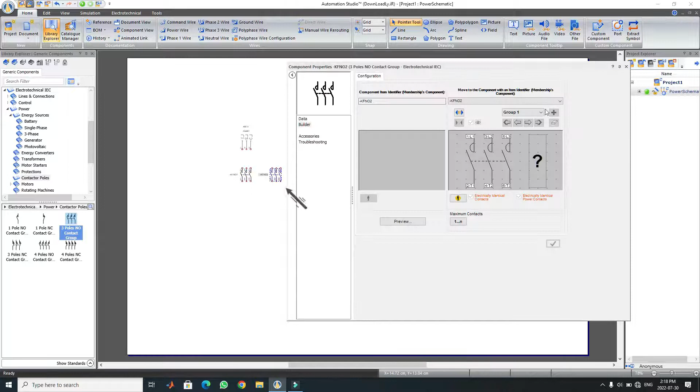This contactor will be used for rotating the motor clockwise. And this contactor will rotate the motor in the other direction, in this case anti-clockwise.

Fuse to protect the motor from overcurrents. Thermal overload to protect the motor from overloads.

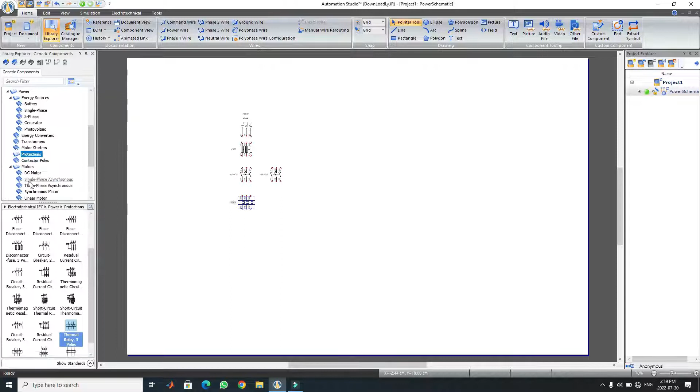This contactor will be used for running the motor in delta connection. This contactor will be used for running the motor at starting in Y connection. Let's connect the circuit.

To change the motor direction you must reverse any two of the three power wires. Notice that L1 wire is transposed with L3 wire.

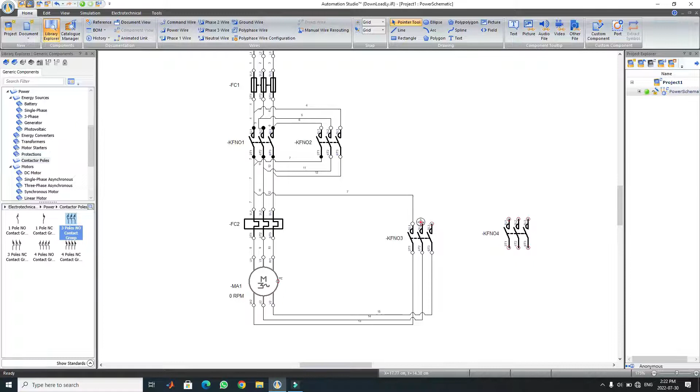You should also notice that the thermal overload is connected inside the delta configuration, so that it can be as close as possible to the motor, and to reduce the cost, as the phase current is lower than the line current by a factor of √3, hence the thermal overload rating will be lower. To connect the motor in Y configuration, the coil ends are shorted together.

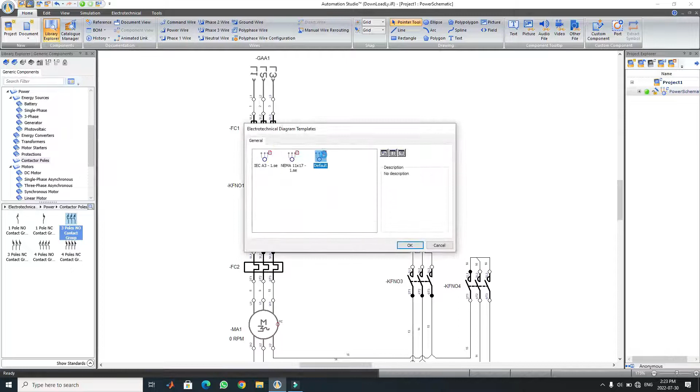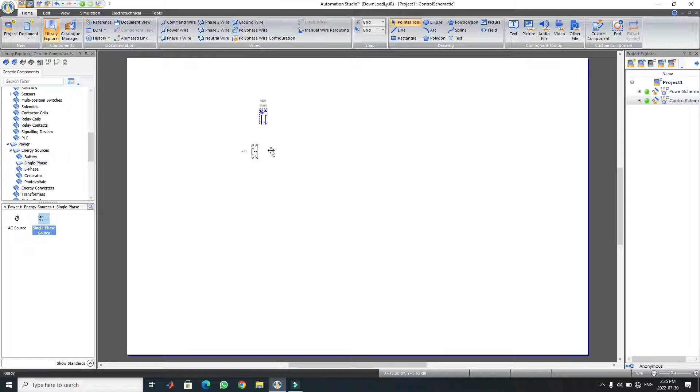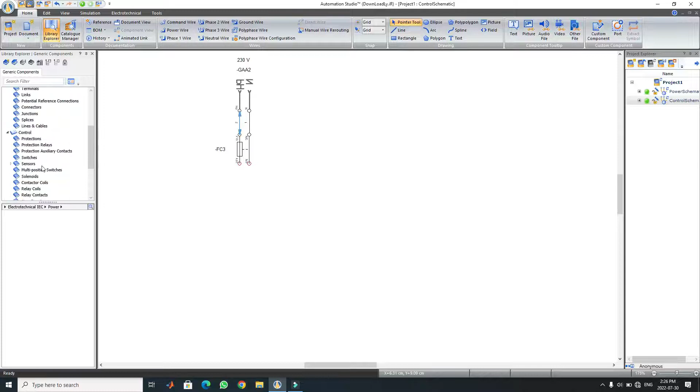Now to the control circuit. Fuse to protect the control circuit against short circuits. Emergency switch to cut the power off the control circuit when an emergency situation occurs.

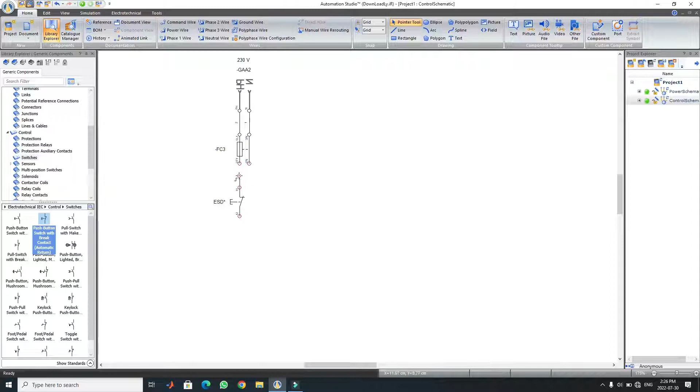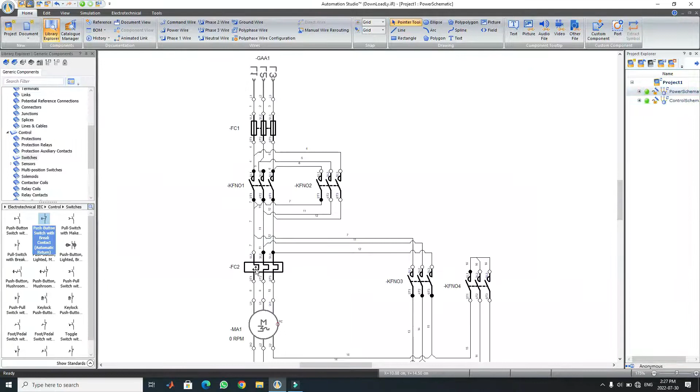Normally closed switch functioning as stop switch. I also need a normally closed contact from the thermal overload to stop the control circuit when there is overload, but I need to extract it from the thermal overload in the power schematic.

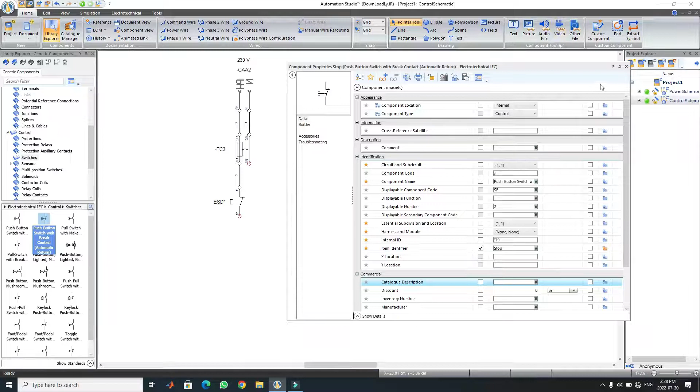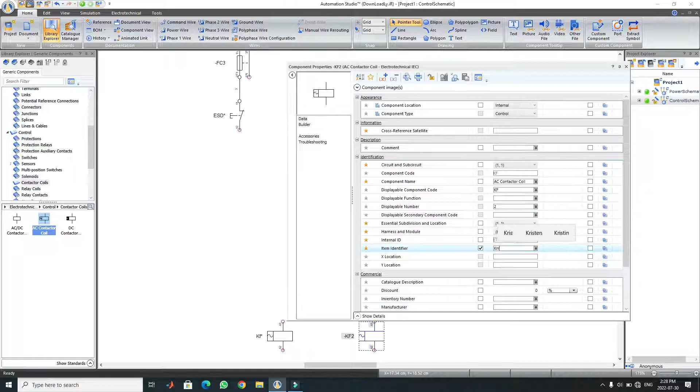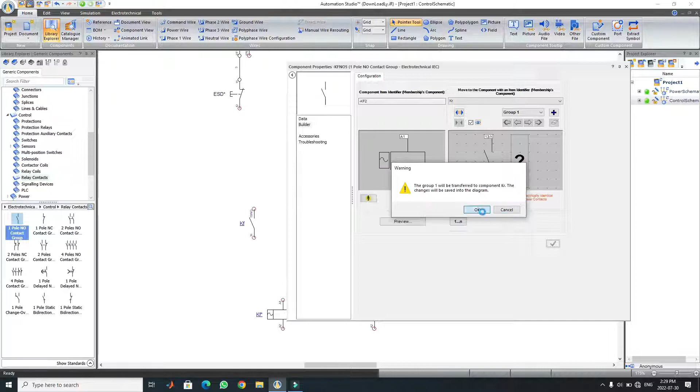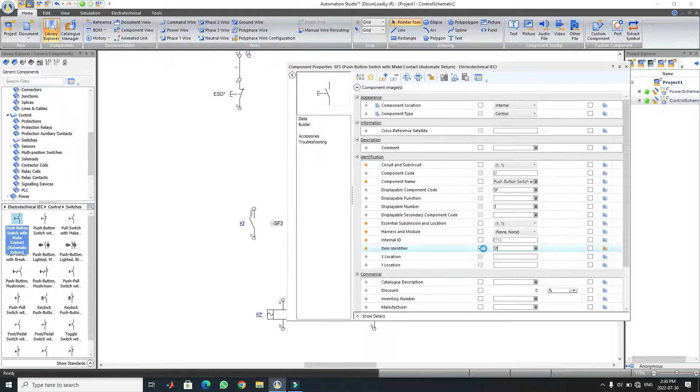Two contactors for forward and reverse operation. Two normally open contacts to latch its own contactor. Two normally open switches to start the motor in forward and reverse condition.

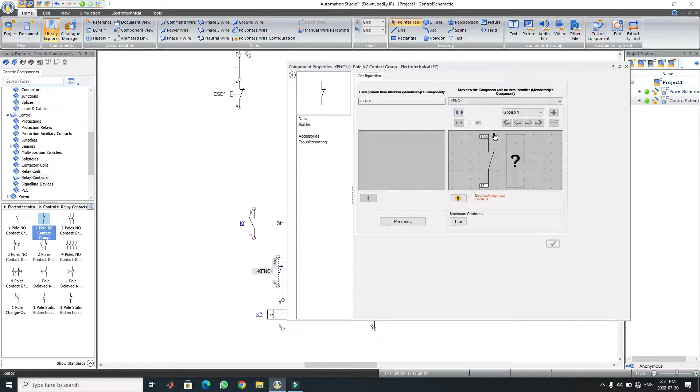Electrical interlock to prevent energization of the forward and reverse contactors at the same time, as it will lead to a short circuit if both contactors work simultaneously.

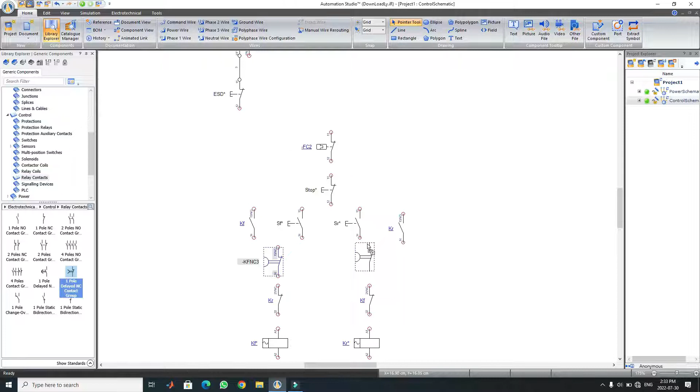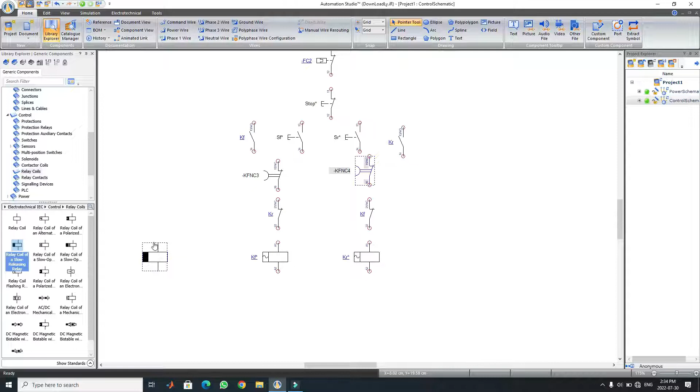Contacts from off delay timer. Off delay timer to prevent starting of the motor when it is coasting to stop.

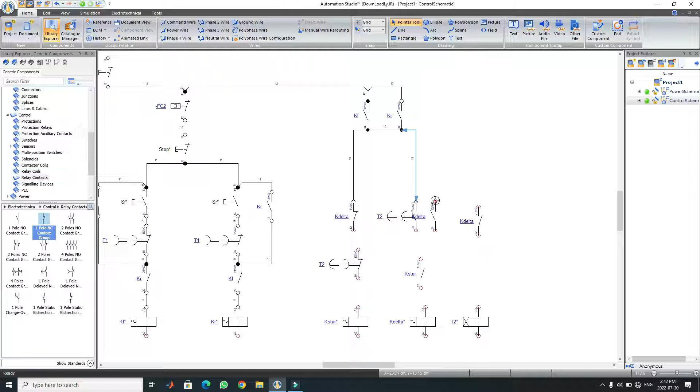Delta contactor works only if the star contactor is not working and the on delay timer T2 is energized, so delta connection works only after the delayed time. This is an electrical interlock between delta and star contactor. This contact works as latch for the delta contactor.

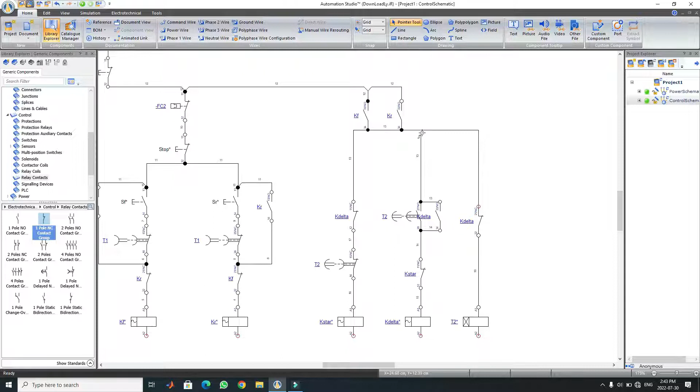The on delay timer T2 works if the delta contactor is not working, and when the time passes it energizes and activates the delta contactor. Once the delta contactor is energized, this normally closed contact changes and becomes open, hence deactivating the on delay timer, preventing it from continuously drawing power.

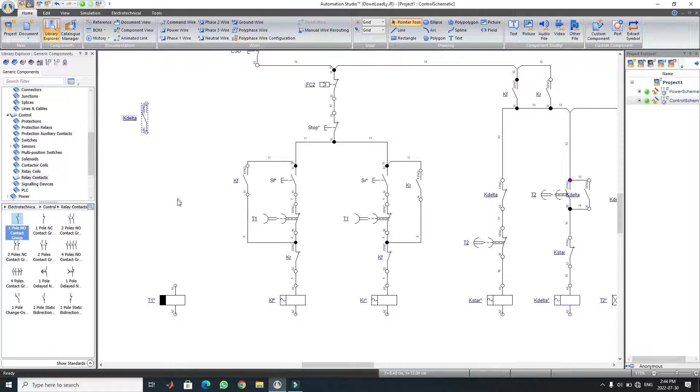Two normally open contacts from star and delta contactors to activate the off delay timer T1. Timer T1 works only when star or delta contactors are energized.

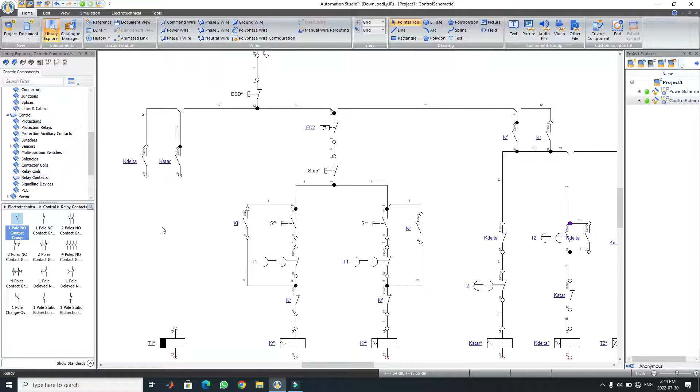Once the motor stops, delta and star contacts change position to open again, but the off delay timer does not change state unless the defined time passes, so its contact stays open, hence preventing any attempt to start the motor in either direction until the time passes, allowing the motor to coast to stop. This process protects the motor from restarting in one direction while it is still spinning in the other direction.

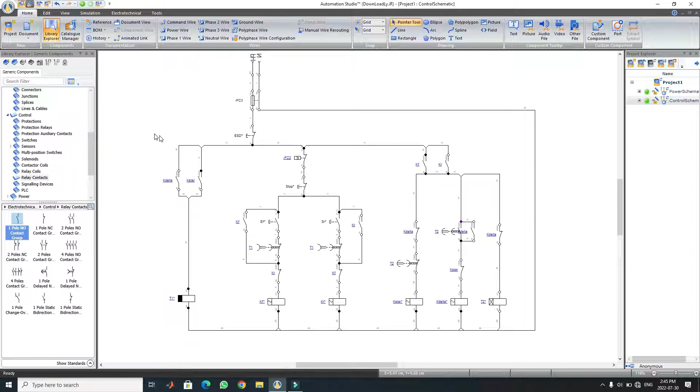Setting T1 delay time. This time depends on the motor deceleration time. In some cases this time could be unacceptable and the motor requires another way of braking, such as stator DC injection.

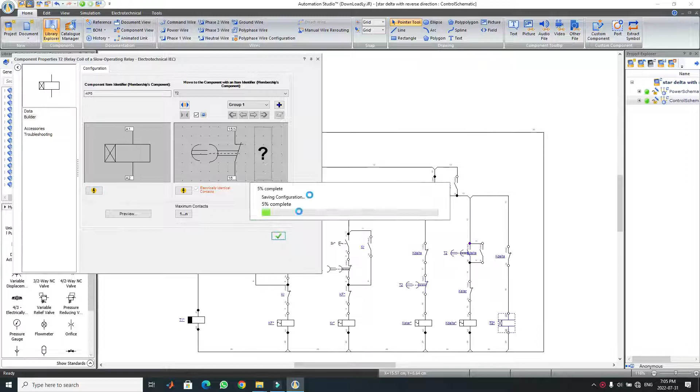Setting T2 delay time. This time depends on the motor acceleration time until it reaches 70% of rated RPM, then the delta connection operates to prevent excessive starting current. Grouping each contactor's set of poles to its own contactor coil.

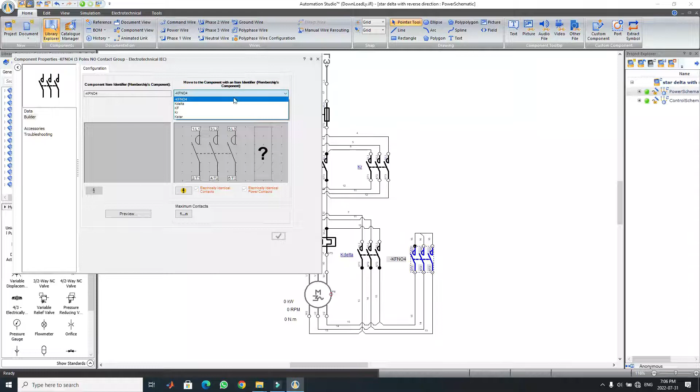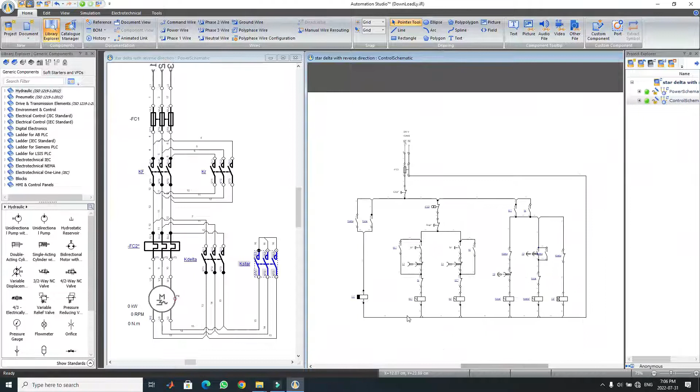Now for simulation. You should notice that I can't start the motor in the other direction, and the timer T1 is energized. Also, the motor started with star connection. After a while, the delta contactor gets in service.

After pressing the stop switch, the motor decelerates and coasts to stop, but I still can't start the motor again in the other direction. After the time elapsed, the motor eventually stopped, and the timer T1 reset, letting me start the motor again. Notice that the star-delta sequence initiates in the other direction in the same manner.